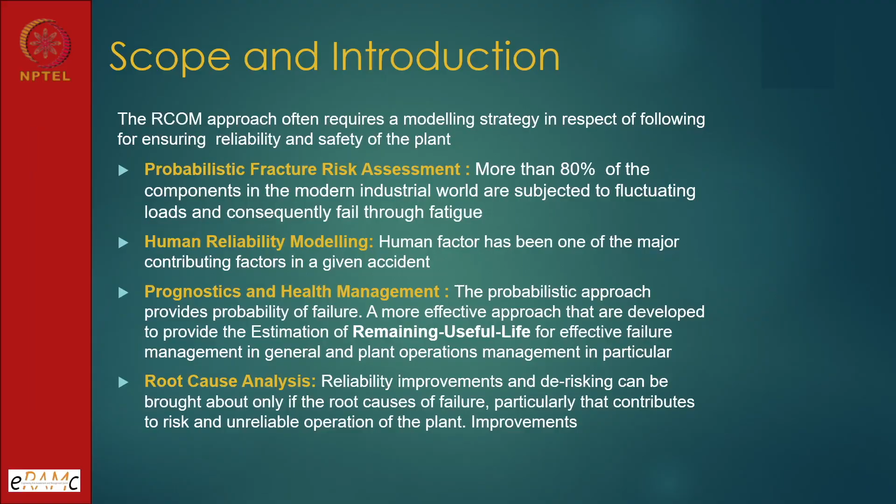Risk based engineering is a very wide subject. In the book there are 15 chapters, and everything cannot be brought in one week. So I have given some aspects in detail in the last 4 lectures, and now I am discussing some aspects which I could not cover, which were part of the risk based engineering book.

The first topic was probabilistic fracture risk assessment. This was one of the chapters of risk based engineering, and I thought let me touch upon this. Details you will find in the book. I will touch upon Paris law, crack propagation, crack initiation concepts, but let us understand the importance of this area.

In engineering industry, 80% of failures happen because of cyclic loading, and cyclic loading induces fatigue. This fatigue fails the component well before its design life, if fatigue was not factored into the design. So 80% of failures can be attributed to fatigue failure.

Second important topic is human reliability modeling. I am touching upon this here just for the sake of continuity, otherwise in risk conscious operation management this is an independent lecture, taking one full week, and there cannot be any shortcut. I have to devote time on this. Similarly, prognostics and health management is part of risk based engineering, but it has not been covered as a separate chapter, so here I will be touching upon this aspect also.

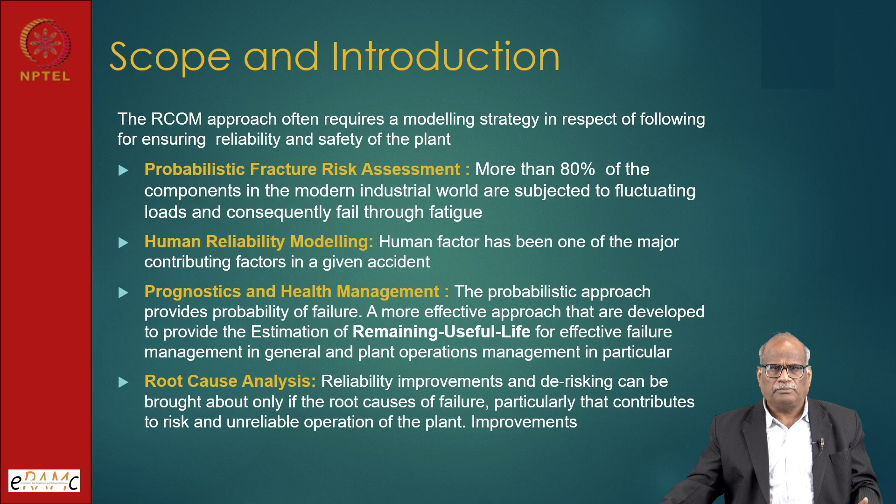If you look at probabilistic fracture mechanics, we have three major phases: crack initiation, crack propagation, and catastrophic failure. Catastrophic failure means a critical crack size is crossed, and now the component can fail anytime, it will not give time. It is mostly applicable to structural systems, like piping, tanks, or especially pressurized systems.

Probabilistic analysis is required here because the modeling for cracks is an area where every aspect, from crack initiation to crack propagation to catastrophic failure, is laced with uncertainty. An advantage with crack analysis is we can simulate experiments, which we'll show in the next slide. Experimental facilities can be built, so that is easier.

But then the field uncertainties are totally different: one-time impact, corrosive conditions, internal corrosion, external corrosion. So the attack is happening from both sides. One is the internal defect which remains latent, then the external corrosion condition. So our factor of safety is coming down, or our uncertainty is increasing.

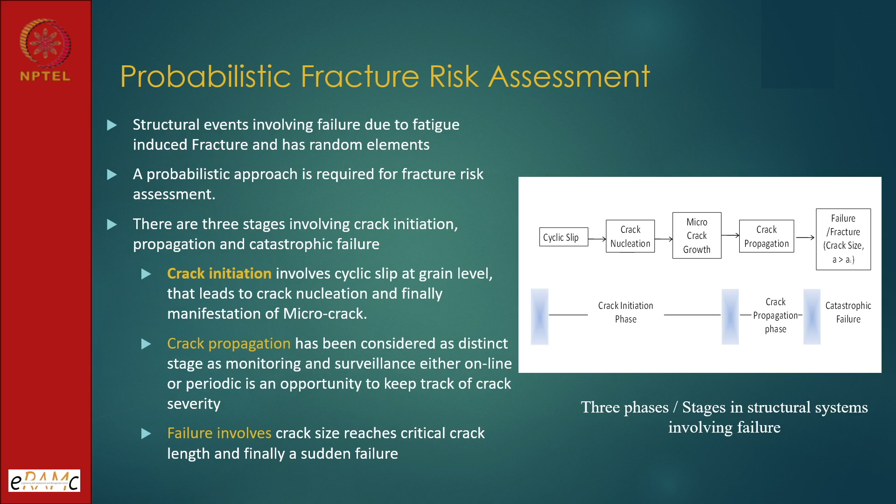So some sensor module has to be developed, then data has to be processed, and most of the time it requires intelligent processing. There was the SN curve, stress and number of cycles curve, then finally fracture mechanics came, and now I am focusing on the probabilistic PSN curve: probability, stress, and number of cycles. This gives a more complete picture, and the PSN approach is becoming very popular in fracture risk assessment.

Fracture risk assessment means every crack has got some penalties associated with it. That is why even if it's a plant shutdown, it is called reliability risk - you are losing something on reliability. If it is an accident, it is purely a risk thing where fatalities are the consequences.

The traditional approach to handle surface or volumetric crack detection was in-service inspection. That means there's a percentage criteria, and those locations will be inspected using NDT methods, especially around the weld. Weld zones are really sensitive because the heat-affected zone around the weld requires special attention, since cracks there occur in material that is neither base material property nor weld material property, it is in between. This requires a thorough assessment for qualification.

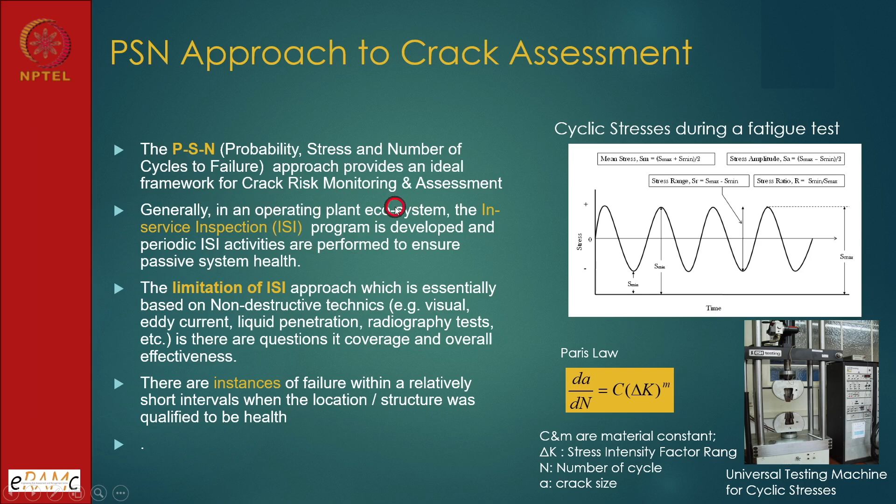So, this is all about, and then probability is again, as I told you, this approach remained in deterministic domain, and now people have realized, like we talked about deterministic approach, wherein uncertainty, best estimate, probabilistic upper bound and lower bound came here also. So, here we complete the scene.

If you want to read this subject, because time was the constraint, you can open any book and see how probability, stress and number of cycles are correlated. In my book, that is Risk Based Engineering, I have dedicated one independent chapter on this, and many materials are outside. Now, second important topic was human reliability.

Human reliability, I am showing only one slide here, because in detail we shall be handling this as an independent lecture. So, human reliability and common cause failure, they trouble an analyst. Why? Because one thing has been understood, that uncertainty associated with the human reliability data and common cause failure data is higher compared to our hardware component failure.

Why? Because human is a complex system to model, and common cause failure, even though there are implicit consideration of the causes which can result into common cause failure, in plant operation or design, provisions are made, like 3 redundant pumps. If they are located in one location, they have physical separation. Why? Because a single common cause, let us say fire, or even flood, should not affect the other system. If it is flood prone, then barriers are also created.

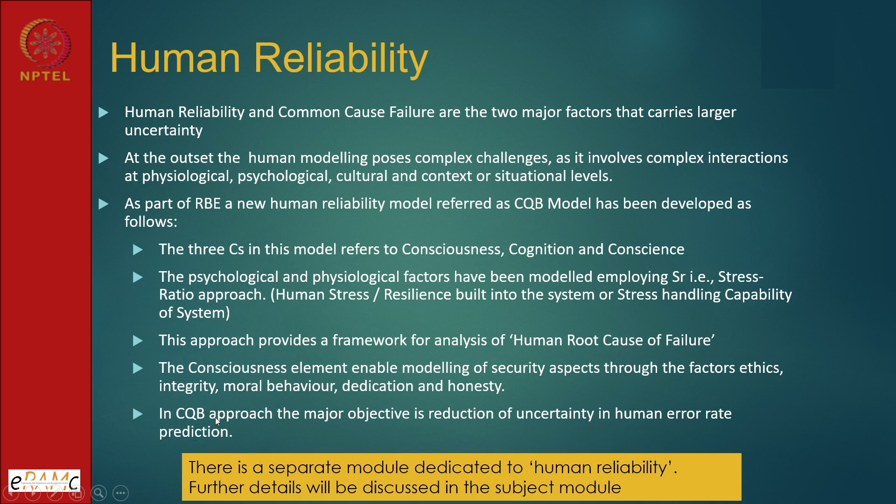So the CQB method's major objective is to reduce the uncertainty associated with not only estimation; understanding of uncertainties is also very important. There is a separate module on human reliability analysis in this risk conscious operation management for complex engineering systems. So I will go to the next topic, that is system approach to prognostics and health management. This is a new paradigm, or an additional paradigm, in the area of prognostics.

In prognostics, generally we talk about a component, structure or a system. But if we look at the mega plants, it is not easy to find an optimized way of where we should go for prognostics, because prognostics is a very expensive, resource consuming, R&D consuming exercise. It's not that we'll put sensors everywhere. Only a few selected locations which require it, like it could be life limiting, or it could result directly in an unsafe situation, or it is part of a life extension program.

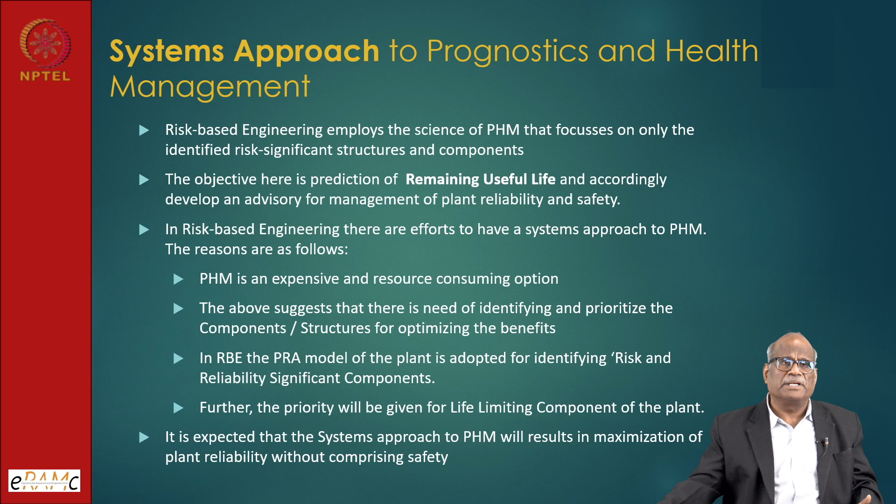So that is where we can put prognostics and health management, because intelligent processing forms part of prognostics and health management, like machine learning, artificial neural networks, support vector machines, and the objective is to assess the remaining useful life and support the decisions. Once I know where I am and how much time is available to me, I can take decisions in real time in a plant control room scenario.

Now, I am listing out various reasons; it is also an expensive exercise, so there is the need for identifying the priority. But why do I require a systems approach? Because when I have a PRA model of the plant, I can prioritize the safety requirement. It could be plant policy, it could be systems, structures and components, and then I can determine very easily where I should go, and if I am able to see benefit in terms of reliability, availability and risk altogether, then definitely I should go for PHM.

Further, the priority will be given to life limiting components of the plant. This is especially important when organizations approach a regulatory body for life extension of the plant; then regulators will ask: these are the life limiting components of the plant, tell us what you are doing. So there could be an easiest way: we are going to implement a prognostic approach wherein we will get information about the remaining useful life of the component, and it sounds convincing.

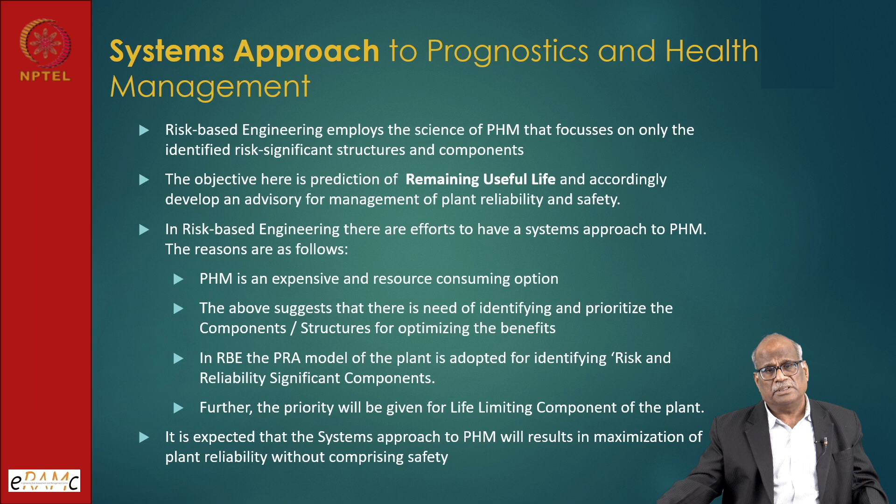It is expected that the system approach to PHM will result in maximization of plant reliability, not only safety but reliability also. So let us see how we do it. Well, we have SSCs from a nuclear plant where, out of thousands or tens of thousands of components, we have identified some number of SSCs. Let's say a bearing, or some piping, or some support, and we have put a sensor. The sensor could be a vibration sensor, temperature sensor, stress sensor, impact sensor. So information is coming from the online sensor for tracking the precursor.

The first job in implementing PHM is to identify the precursor parameters. It could be 1, it could be 2, depending on the situation that we are handling. And then we should have a prognostics algorithm. That means not always will a linear case be there. So this is where the intelligent approach is required, like artificial intelligence or machine learning, where the system has to be trained based on either past cases or experimental data on how the failure or degradation will proceed, and when it will touch a threshold value.

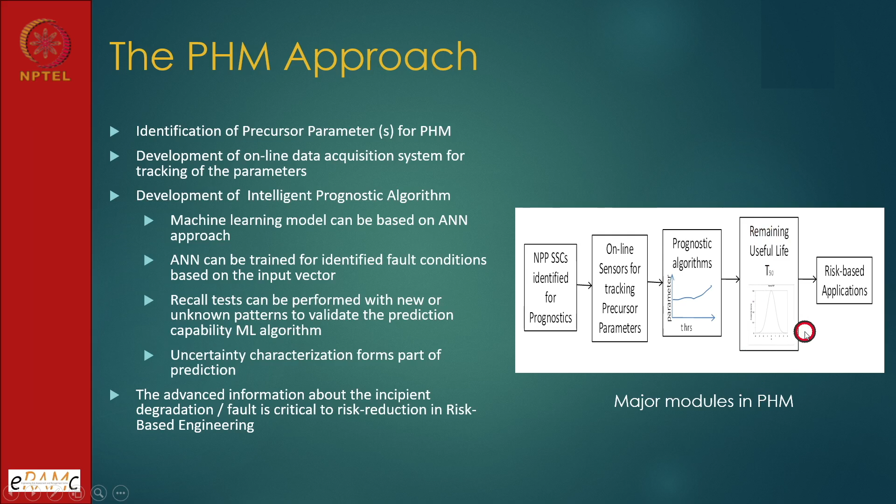There is a threshold value. So before that threshold value, because it is prognostics and health management, we have to take some corrective action. And then finally, for uncertainty, whatever estimate is there, for the uncertainty prediction we have to give the upper bound of the band. So this is a distribution. I have shown it by a normal distribution here, and we will get a remaining useful life statement with an uncertainty bound, and this forms part of the risk-based engineering applications.

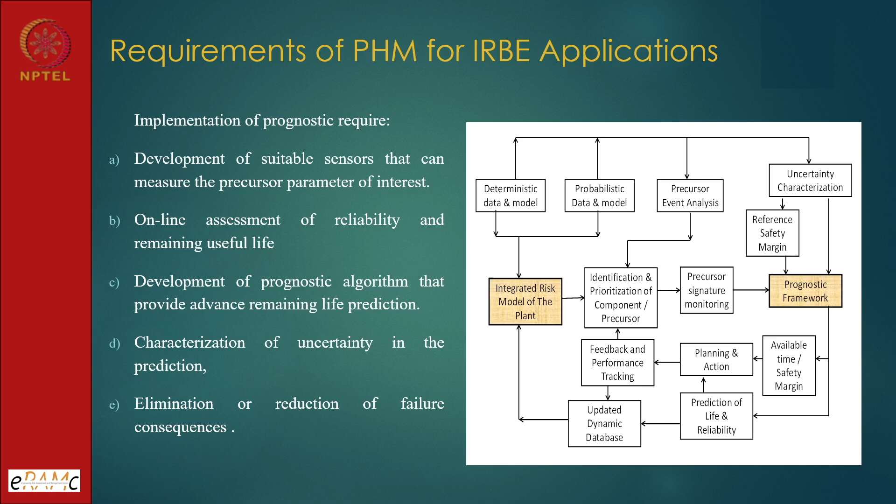Now, the proposed PHM for a nuclear plant, something we have adopted from the previous thing. So, we have a nuclear plant. This is one paper I have published through the PHM Society. You can see it in the open domain, it is available, I think from 2012 or 2011: role of prognostics in risk-based engineering. Okay. So, for a nuclear plant we have design information, a corrective action program, monitoring, and they operate in a closed loop. Design and performance requirements, online data acquisition, monitoring, surveillance, and the corrective action program. So this is how the plant operates.

Now, if you have to implement PHM, we have to install PHM sensors, and the data has to be obtained through online data acquisition. So online data and PHM sensors are there. And then we go to the prognostics algorithm, and there we combine with other data also, through Bayesian updating or ANN, and finally the optimization of prognostics and real-time reliability prediction, remaining useful life. And here we have the FMECA or PRA model also, which can plug in here for the prognostics algorithm. And this is how we can do it for a nuclear plant.

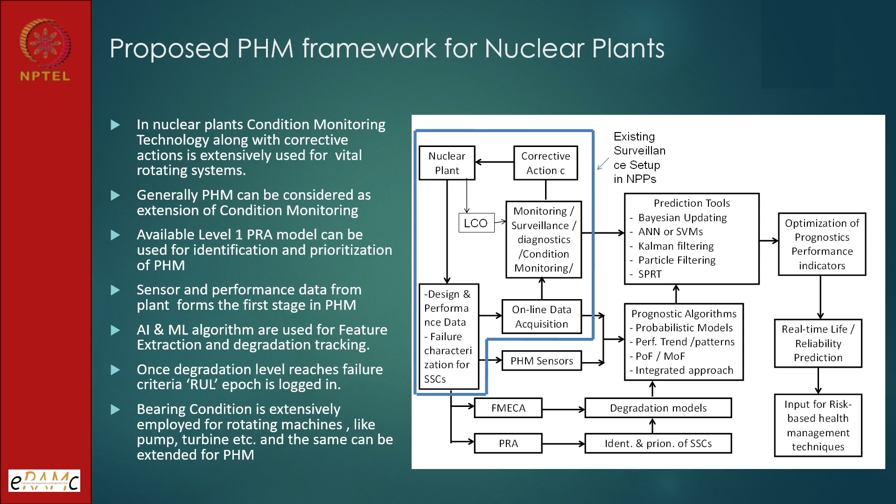But I do not think it will make any difference; this framework can easily be adopted for any other plant also. But yes, the PRA model must be available, because that is very critical for identification and prioritization of the scope of prognostics.

So, in this lecture we have seen the special topics: prognostics and health management, fatigue and crack risk assessment, human reliability in just one slide because we have a separate chapter on it, and the role of deterministic and probabilistic we have discussed. So, to give the overview of the week: introduction, one lecture, then the risk-based framework in the second lecture, deterministic and probabilistic with two separate lectures, and then the special area. With this, we complete the third module or third week, risk-based engineering, which provides the fundamental framework for risk-conscious operations management.

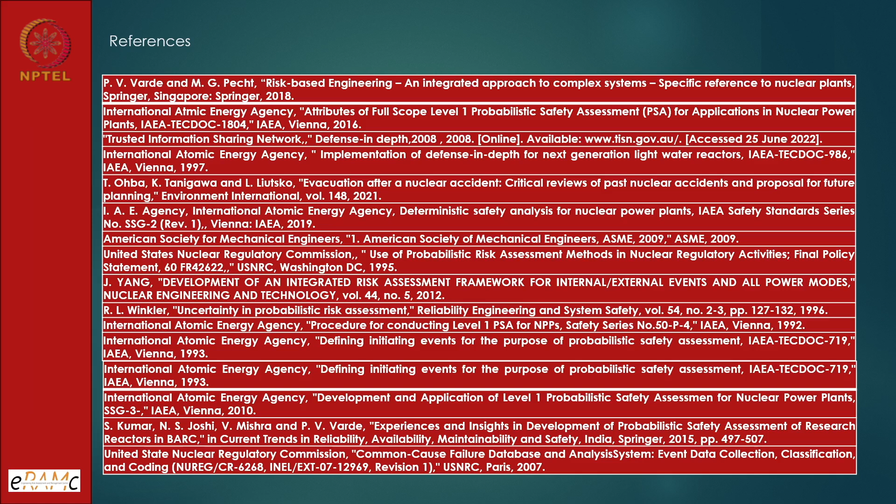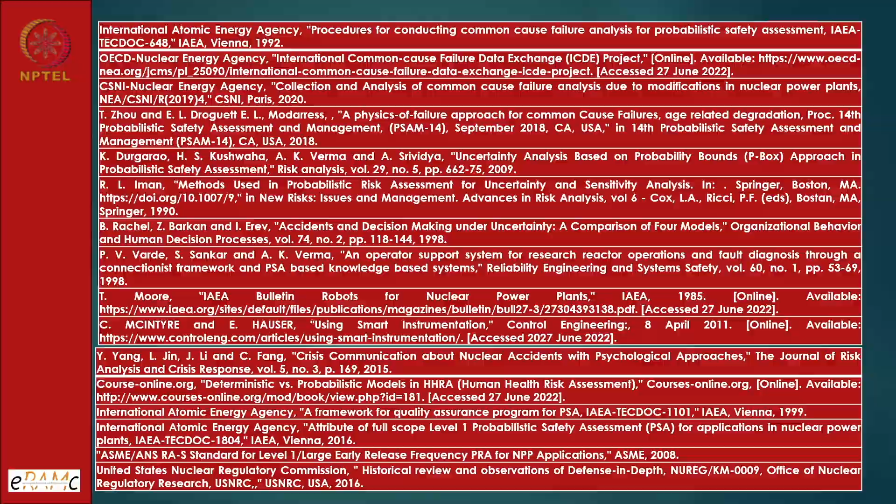These are the papers which are available in the open domain. And there are many others also, many international sources, the International Atomic Energy Agency, Nuclear Energy Agency, and with this week 3 on risk-based engineering ends here.